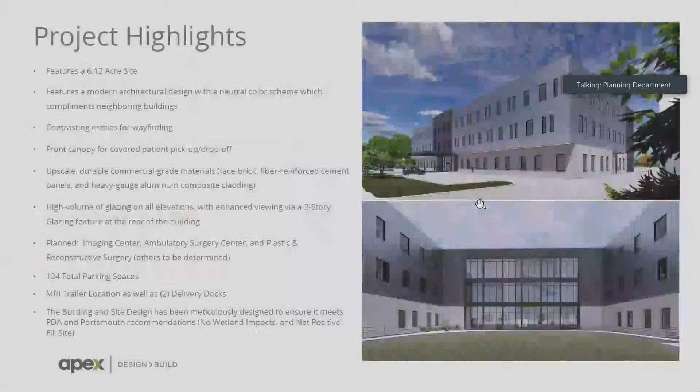So just to start off, first page here, I know you guys were part of the workshop session. We really appreciate the feedback there as well. But this is a view from Corporate Drive, so if you were looking basically about northeast is what it ends up being. That's the front facade of the building. And then if you go to the next page, it gives you another perspective from the Corporate Drive entrance on the top right, and then the rear of the building basically gives it a large atrium effect that looks out the rear at the wetland space.

It features a 6.12 acre site, modern architectural design with neutral color scheme that also complements neighboring buildings. Contrasting entries for wayfinding, front canopy for covered patient pickup and drop off. Upscale durable commercial grade materials, features fiber reinforced cement panels, heavy gauge aluminum composite cladding, high volume of glazing, as you can all see both front and rear of the building. In terms of planned right now, imaging center, ambulatory surgery center, plastic reconstructive surgery are the 3 planned options. We're still in discussions with other tenants and have had good conversations in the background.

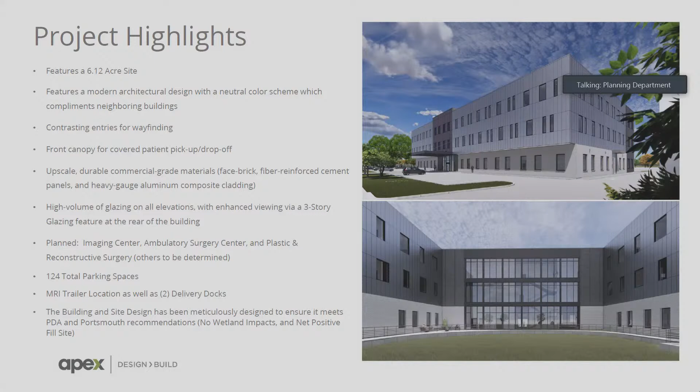There's a total of 124 parking spots. We did have an MRI trailer located at the back, and I think that was talked through a little bit more in depth last time. And the building and site design has really been meticulously designed. As you all are aware, there's a lot of wetlands on the site, and we worked in the background with the PDA to come to a spot where we're not affecting any wetlands or wetland buffer.

So moving to the next page, wanted to give you direct feedback from the previous workshop meeting. I know some of this font is a little bit small. What I did is isolate things that were big picture items that needed to be addressed absolutely for this meeting. Now, there's a number of comments that came as a result of, we'll call it details that would come on like construction documentation or permit level documentation. And I know there's some additional questions that came out from today as well that we would like to talk to.

Mr. Howe, drive aisle width was increased at the front of the building to 26 feet. So that allowed us to shorten basically the parking spots at that location. We are providing clearances for emergency vehicles, whether it's fire truck or ambulance in that situation. Public Works feedback, so there was a question about underground power connections. We have talked to Eversource. This has been incorporated and updated on the site plan.

I know there's a comment that came through today about an open trench versus directionally boring, and we'll definitely take that into account for the next rendition. There are 2 water services to the building now, so we have the fire service and the domestic water service as well. Those will be final size per the mechanical engineer. And obviously, we're engaged with the mechanical engineer on the project to get through those phases. The mill and repave on International and Corporate Drive.

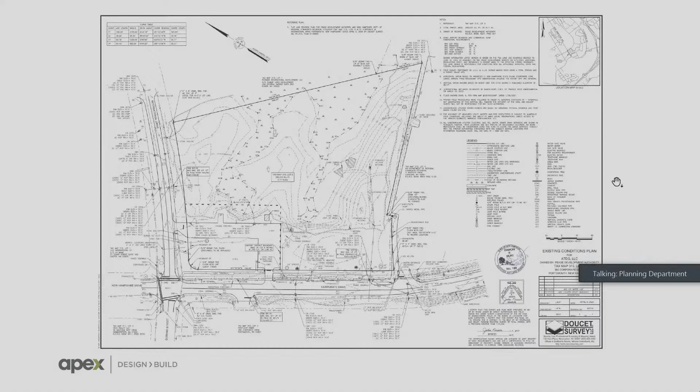Next page, this is just a depiction. I know we've talked about previously, and the PDA has stressed this to us, is the site has to be compatible for keeping all spoils on site. So this is a net positive site. This shows a depiction of a site preparation plan along with spoil stockpile located at the lower left-hand corner.

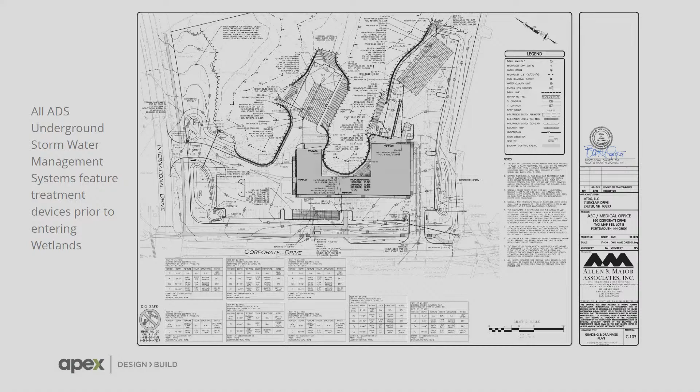Jumping over to the next. There is a question on stormwater management plans. This is obviously, we're getting, I would say, like an 80% set essentially right now. So basically, once we get to a permit level drawing, this will all be accommodated. You'll have further details of the underground system. But right now it's stipulated to be an ADS underground stormwater management system. It does feature treatment devices prior to entering wetlands to mitigate any issues that may come of the stormwater runoff.

Out of the last meeting, there was some conversation regarding the sidewalk. So the sidewalk has been adjusted. There's a couple new conversations that came outside of that. Most notably, the ADA ramps at the entrance off of International. Those will have to be incorporated. There will have to be accommodation to the bus drop-off area, and we'll get into further detail on that, as well as the mill and paving. But I did want to highlight those items have been updated as of right now, as well as the 26-foot drive aisle at the front of the building.

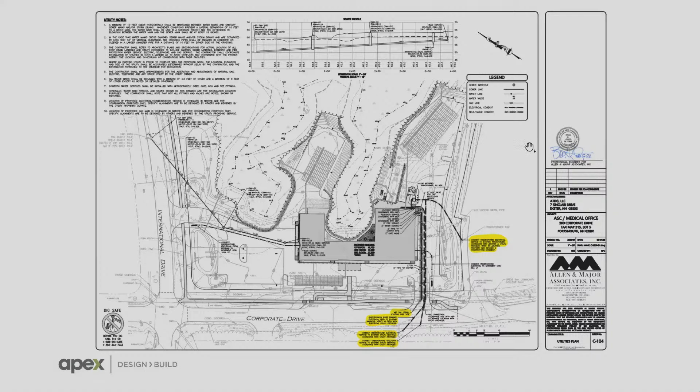In terms of utilities, so this rendition is obviously very different from the last one. We talked about an overhead electrical service to the building. This rendition is based on Eversource's feedback. Michael Busby gave this feedback directly, and then we've submitted formal documentation to them for that service. But basically, he's talking about a redundancy loop that feeds off of the next door neighbor, that being the transformer located at the college. And then that would come back through and tie into the underground system located across the street on Corporate Drive. This does obviously include the 2 new water services, 1 fire service and 1 domestic.

We talked a little bit about the radii, so I wanted to include the truck turning radius to show the depiction of movement through the site. We can discuss increasing the radii for truck turning radius at Corporate Drive, and I think that's something that's easily accommodated without a doubt. So with that said, ran through obviously the things that came up that were big pertinent items last time, but would appreciate any comments or questions from you all as well.

Did you address all the comments that were sent out today, or can you run through those? I know they were sent out just today, but yeah. So we're happy to answer those questions. Just as a clarity standpoint, I think what we would be requesting is that any changes that come through the drawing phase, we'd like to incorporate those on like a permit drawing set. There are some details that are being requested that wouldn't come until, we'll say, like a CD phase or a permit level of drawing. So that's what we would like to request on the front end, and obviously open to your all feedback.

In terms of driveway on Corporate, we talked about enlarging larger radii there. This can definitely be updated. I would just ask what would be the preferred radii that Portsmouth would like to see in that situation.

What was the radius on the driveway? Where are they? It is, I believe, shown on the drawings, and I think we're at 20 or 30. 20 and 25. And the 20 is only because there is a utility pole there. And then on International Drive, it's 30. Brian, could we increase the radii to 30 on the north side of that?

Yes. I think one of the other things that we'll do is we'll work with one of the tenants, the ambulatory surgery center, which will be managed by a firm that has a pretty good bead on what a lot of their deliveries occur with, and I'll ask them for some. We'll solicit some data, and then work with that so that we have more accurate data.

And I was going to say, too, it could be stipulated within the lease arrangement with the ASC, with imaging, and so on, size stipulations of trucks for delivery, without a doubt. Yeah. I think if you went to the 30-foot radius on that one corner, that could help you a lot. You don't want to have a situation where you have trucks running over the curb and tearing it up, making it look lousy in the future. Exactly. Yeah. Right. Correct.

Sorry, go ahead. With the rarity of having a truck of this size there and adjusting the radius to 30 feet, would that satisfy what you guys are looking for now, or do we need to make an adjustment and reevaluate and come back? I think that, and then we'll also come back with, hey, we think the majority of our deliveries are going to be this size, this turning radius, and then potentially one more turning radius exercise with that actual truck, just to show how it sits on the new one. Yeah. I think the 30-foot radius should do it.

You're saying the access aisle can't be right next to the building. Correct. It's got to be 15 feet off. So you may have to flip the parking against the building to do that. You can't push the building back. Correct. So as you position your fire apparatus, it can be on the bottom side of the drive aisle, the west side, 15 feet away from the building. It's a 26-foot wide drive aisle, so you could have your fire truck and still be 15 feet away from the building.

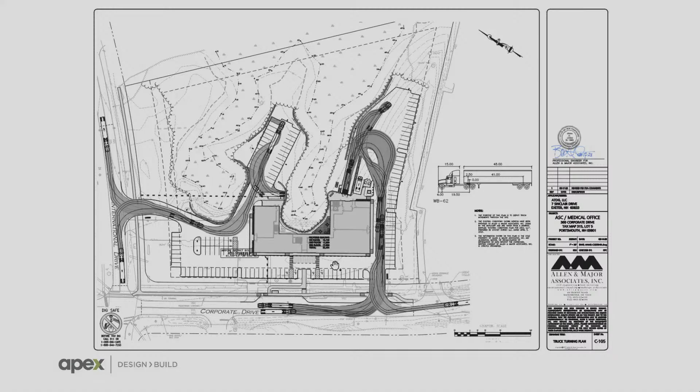I would just go with Appendix D of the 2018 IFC, which states clearly there'll be a 26-foot wide aerial apparatus access road. It will be no less than 15 feet from the building, and no more than 30 feet from the building. It's pretty clear. Isn't that what we have, though? Not on the right side. You have to swap the parking, put the parking against the building, and then put the road to the right side, and then you'd be maintaining the 15-foot distance to the building.

We're not talking along the front of the building? We are? I think you're talking about the right; I'm down here in the front. How about that? So we would count this as the front of the building, as the aerial apparatus access. Yeah, okay. And reaching over the cars is not a concern? We need to reach over; the turntable is above the level of the cars to begin with. Okay. We might lose a couple of parking spaces, maybe two over on the left. Very minor overall.

Yeah, we'll take a look at it and play around with the apparatus. And when you show the turning template, just make sure you show it going all the way through and back out. Okay. Maybe even check two? Yeah.

Moving on to the next question, there was talk about sidewalk tip downs at the International and Corporate intersections on the driveway, and obviously the truncated dome tiles that comply with ADA. That will be updated on the next version of plans where it's missing at International Drive, and we'll also update the sidewalk width and dimensioning. Can I chime in on that too, Jeff? Sorry. On International Drive, we actually don't envision tip downs there. Here only. This is the only spot that you need the truncated domes. Cross street intersections; we don't require them crossing driveways.

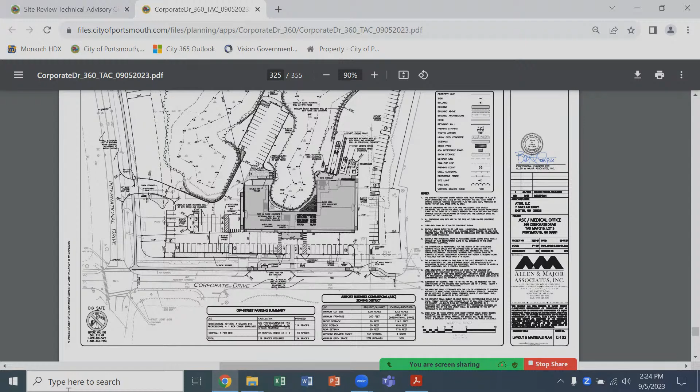Can I just ask a clarification on that? So we did file our drainage report. That includes everything that we do for stormwater management. Is there something else that the city's looking for? Is there a separate stormwater management plan in the back that tells the operator of the site, once everybody's gone and the building's built, how to maintain the stormwater system? Yes, that's what we're looking for. Yes, there is a section, that operation and maintenance plan in the drainage report. Just refer to that. Okay. Yeah.

Next question was relating to saw cut, mill, and overlay limits of work. We would just ask, where are the delineation points that Portsmouth would request? From wherever you're disturbing through the intersection to wherever you're disturbing. Okay. Because it's all relatively brand-new pavement, so it'll be fixed once you're done. Right now, we show the delineation point stopping just before the intersection at both Corporate and International. You want us to continue through that intersection, or are we okay stopping just before? It depends on what goes on with that handicap ramp. Okay. Brian, is that enough detail? Yeah, if we disturb the curb, then we'll fix the pavement. Okay?

Next question was relating to all valves and hydrants must be open left and must stay open left on gate boxes. Assuming this is something that we can update on permit drawings as a general note. I keep saying that, because you're not used to working here, this is the only technical review you get, so this is the last time the drawings get reviewed. That's why we're specific, we want to see all these things, because none of these people are going to review this again. Okay. So we need to get all this stuff on the set, so that we can say, yes, we can sign off on it, then it goes to the plan. That makes sense. Thank you for your clarification.

Show piping in infiltration chambers with distribution manifold detail from the manufacturer. So I'll just jump in there. We're not proposing a manifold for these systems. It's not required. Certainly, we can provide one if the city thinks it's necessary, but they don't require a manifold system. We have access to the isolator row for maintenance and cleaning out, and then the stormwater just goes through the sides of the chambers in stone.

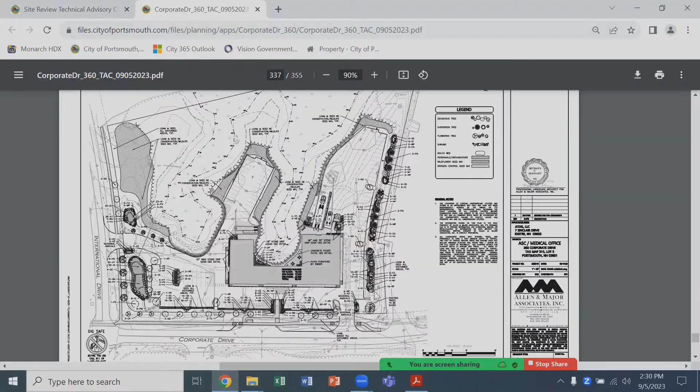Yeah, I think it was the isolator row that we wanted to detail. Okay, I can make sure that shows up. I think in this particular case they're talking about the same thing. Right, but we're not proposing to connect every row of chambers. Right, but the isolator row is the one that collects the sediment. Yes, that's what we want to see in the detail. Just want the manufacturer detail on the isolator row. Shows them how to build it. Okay, no problem.

Next question was about planting and loam seeding details must meet city standards. Was assuming this was a generic comment that needed to be updated on the drawings. Gonna have to do a little research. I'm not sure what that means, but I already talked to the landscape architect, so she'll track it down. She should know offhand? Can anybody just call our parks people? Is it a seed mix or? No, I think it has to do with the loam, like the percentage of organics and different percentages. Okay.

Sorry, who should we be getting the landscape architect in touch with? Corin Hallowell. Thank you. And that's a specification that we have to meet? Because I'm assuming they're going to strip all the... Anything that's in the right-of-way. Just the right-of-way? Yep, that's all they care about. Okay.

Next one was about snow storage areas. We probably need to reevaluate snow storage and make sure the proper amount of space is allocated for that. So we could do a review with Brian and make sure we're accommodating for Portsmouth. Water main taps by city staff. Was Portsmouth looking to see a generic comment or details within the drawings? Construction note, so they know who to call. Okay.

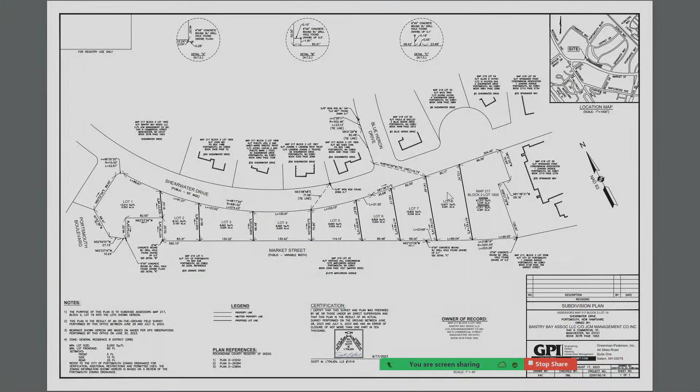If you go to the existing. So the existing, or the buildings that were on these lots have previously been torn down. The driveways and parking areas are still out there, but the buildings have previously been removed. So the proposed project is to subdivide this single lot into 8 single-family residences.

Included in the packet were architectural depictions of, I believe it was 8 or 9 different building types. We've depicted a variety of those on this site plan. The intent would be that the final buyers of the lot would select from the list of available units that would be built. We did take a look at sort of a matrix of each lot and which building types fit on each lot. So not all building types would be permittable on each individual lot, but each lot does have multiple options for building or house types.

So we are proposing to rebuild the sidewalk along Shearwater, along the frontage of the site, as well as milling and overlaying the same extent of Shearwater with new driveways for each proposed house. The next sheet is the drainage and grading plan. So we are proposing to have stone infiltration drip edges along the fronts and backs of each of these houses where feasible. We're also rebuilding the drainage between Shearwater and the outlet points on the Shearwater side of the Market Street berm. I know we got a comment related to that I'll touch on in a bit.

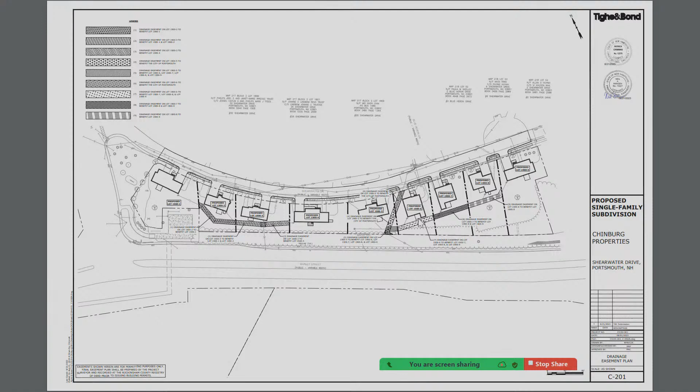Okay. Old water service taps should have corp closed and capped at main. So we do have a note, utility note 19, that speaks to that. Okay. It says if the existing water line is less than 1 inch in diameter, it shall be capped at the main. New copper line and water shutoff shall be constructed. Are we not permitted to reuse any of the existing services? Do you want all new services? It depends what the material type is. Okay, but if it's copper, we're okay? If it's copper and it's large enough, then I think it makes sense to reuse it. Okay.

3, abandon or replace all existing cross-country drains with HDP to Market Street. So we had shown on here replacing with HDP to the Shearwater Drive side of the berm that runs along Market Street. The intent was to not get into that berm. Again, there's some mature vegetation. It's a pretty well-established berm, and we were looking to avoid doing any work that cut through there. You want to slip line it instead? I can bring that to the applicant if those are the options. That's your options. Okay. We'll bring it back to the team and see what they want to do. Okay, yeah, replace it where you can and slip line the rest if you want to.

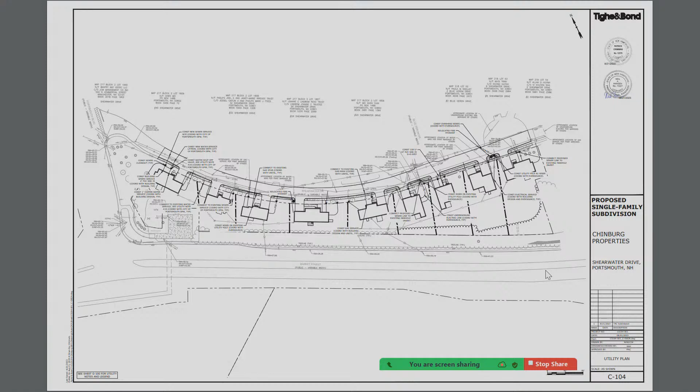Replace CMP drain in Shearwater near Blue Heron Drive with HDP. I think we're fine doing that. There's, I think, 2 different runs that I'm assuming you're referring to both of them. The line that picks up the city street drainage, we're going to want replaced entirely. There's one that goes parallel with Shearwater across the Blue Heron intersection, and then there's one that crosses Shearwater. Are you wanting both of those? Yes. Okay. Yeah, and then replacement out to, so you're putting a drain manhole right by a drain manhole.

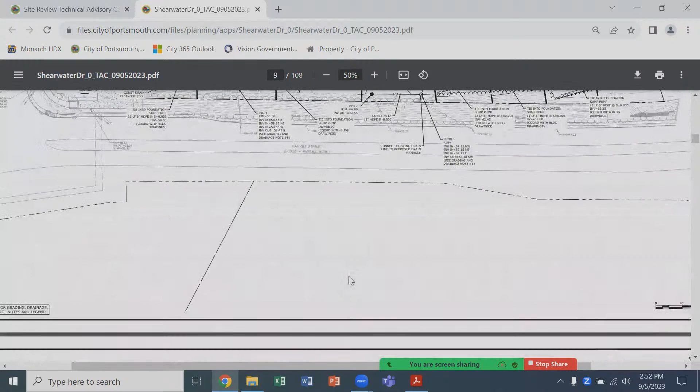So that's again because of the trees. See the line, yeah, so the lines are gonna have to get slip lined. Are you looking at behind, like, the? So this pipe and this pipe need to get changed. Yeah. This pipe needs to be replaced. Yeah. This is all plastic, going to be plastic. Yeah. And then you need to slip line this to make sure that this doesn't collapse underneath this berm, otherwise all these drains are gonna stop working. Right. So we're gonna want that done.

So slip line this line, replace it to the drain manhole, and then this pipe over here, I don't know if that's getting replaced, or this section is getting abandoned? There's a little pipe, you see that? I'm behind, the lots aren't listed. Yeah, I see what you're talking about though. This pipe, is that pipe being replaced by going this way instead? Which I'm fine with, but it doesn't say abandoned.

Oh, yes, I think it's on the demo plan as being abandoned. So we're either replacing or slip lining everything, all the way out to Market Street. Okay? Gotcha. So there's no chance that the pipe's gonna collapse and the houses are gonna end up getting wet. Okay. Number 5 is use city standard planting and loam and seed details. We can add those to the plans.

That's easy. Drainage easements should extend over cross-country pipes to Market Street right-of-way. So I think we looked at that. There was one that we had missed that we noticed. I think it's on lot 3 there. This is lot 3. Yeah. Is that the little section that's being referred to in this comment? From the easement to the right-of-way line? Probably. Just make sure that it is everywhere. Okay.

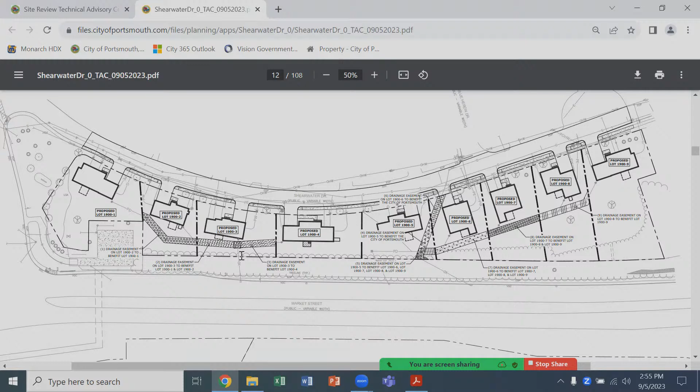13, how do you intend to overcome the doctrine of merger? I have to admit, I do not know what this is, and we will have to pass this along to someone on the project team who does. Yeah, it's going to be one owner of all the lots with easements going across them. Initially, yes, but then they're all going to get sold off. Right, so before they're sold off, that's where the issue comes up. Okay. You can check with your legal team. Yeah, that's way outside of my jurisdiction. It protects the property owners in the future. They don't lose an easement that was approved at the planning board and recorded. Okay, well, take it to someone who knows what they're doing. Yep.

Yep. Will you be requesting a waiver for the maintenance bond? That is the preference of the applicant. Is that a waiver that gets requested to the planning board as part of the package? Yes, part of the planning board process. Okay. We will add that. We'll be doing work in the right-of-way? Yes, we will. Sidewalks, mill and overlay, some utility work.

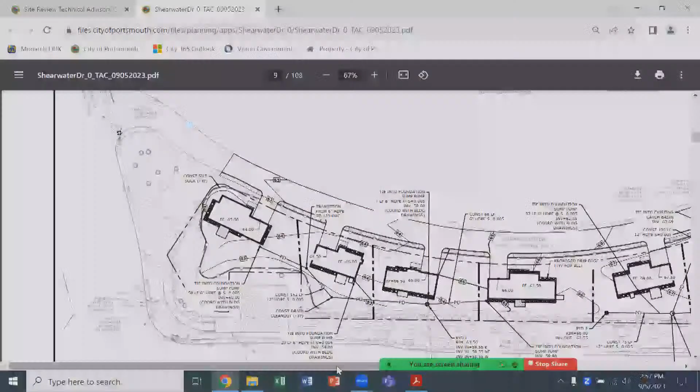How do you propose to treat stormwater before connecting to city infrastructure? So the roofs are going to go into the infiltration drip strips. We at this time haven't proposed any other stormwater treatments. We need more? I guess we just wanted to, we didn't see anything, and we saw a lot of pipes leaving the site, but if that's enough treatment to have the infiltration along the foundation? As far as I'm concerned, the houses are, just the drip strip is enough to mitigate. Okay.

Yeah, just wanna make sure we're also reducing total impervious from the existing condition as well. Yeah, okay, good. We just didn't see anything, didn't know what was going on at the far end, if there was some kind of rain garden or something we missed, but it's just grading, it looks like. Yep. That hill went like right up to the back of that house. And the soils are suitable for infiltration there? I believe so. We have a report. I don't know it off the top of my head though, but we did look at that. I'm assuming it's in the drainage calcs, but we'll certainly double check that.

I guess what I just don't want to see happen is that all the stormwater from the site goes into our storm drains, doesn't go into the ground. Yeah, I mean, that's what currently happens. So it's an improvement. Either way, it's an improvement. Okay, great.

Please enhance the landscape plan. So again, I think I touched on this a little bit earlier, we're replacing some of the bigger trees we're cutting down. The intent was that as the lots are sold off, the individual owners would be responsible for landscaping the property as part of constructing their house. We can look at adding some additional street trees, but I think the intent was to leave the lots kind of open for whoever purchases them to landscape as they see fit. I don't know if there's any other thoughts to that?

Yeah, I think there was just a thought that there wasn't a heck of a lot of landscaping. I understand your point, the homeowners want to do it, but it doesn't seem like. We can take it to the applicant and discuss it with them and see if we can add a little bit something more. Sidewalks more than we need landscaping on private lots, honestly. Yeah.

And then 18, where are the 3 circles in the corner on the easternmost lot? It's the tree protection line. It's called out on Lot 2 there, install and maintain tree protection barrier for duration of construction, typical. We can add a second call out to make it more clear. That's all right. We just didn't know what it was. Yep. So I believe that was all the comments we received ahead of the meeting. If there's anything else, I'd be happy to address it now.

Anything else from TAC at this point? Well, I'll open that up in just a second. Any other comments? Shanti? These are not condoed then, is that correct? All right. I was just wondering about that whole doctrine of merger thing. Seems a little odd. We have one parcel, we're subdividing it. All of the civil engineering, stormwater, everything is all included under this site plan, but you're looking at it as individual parcels, and therefore the easements would be problematic because you're assigning an easement to oneself. Is that the issue?

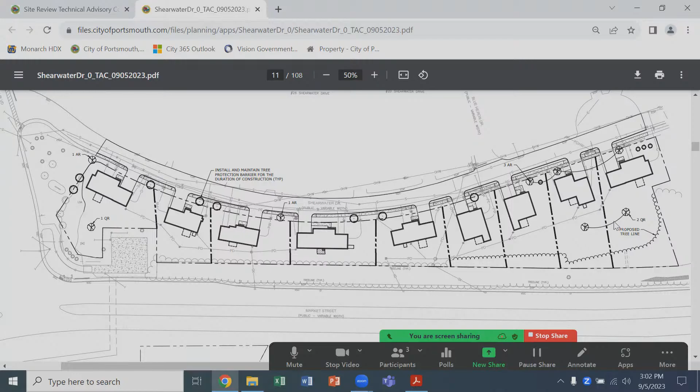So on the 4 lots on the right of this, there are trees that we're going to be clearing out to give some space. So in the corner right by the cul-de-sac, those are where you're going to clear out the trees? Some of them, yes, not all of them. Okay. Oh no, I hate to see that. But of course, I can't visualize exactly how many you're saying, because it is a very good noise reduction. Exit 7 on 95 is just right there, and that's been helpful to block the noise.

And another question is, how tall are the buildings going to be? Are they just 2-story? I don't know off the top of my head. They look like they're 2 stories in the samples they gave. Okay. And when would the building start? Just another question, approximate. I don't know. It depends how fast they get through this board and then the planning board, right? Okay. So you think minimum trees?

Right. Then they've got to sell each individual lot, and then that buyer would maybe hire a builder to build his home. So it could be a year to 5 to 10, depending on how soon the lots are sold. But in this economy, they'll probably be sold pretty quickly, so more than likely within the next couple of years would be the guesstimate. Okay. I would just request you minimize cutting down trees behind the houses. All right, thank you.

I'm Laurie Soloway, and I live next door at Spinnaker Point. So I just wanted to reinforce what she's saying, too. We don't really want to see the trees disappear, because it's a nice barrier for all the good reasons, for the noise, but also for the beauty. And we're just an advocate of it. I know a lot of the neighbors are all talking, and just want to make sure that all the trees aren't going to be cut down.